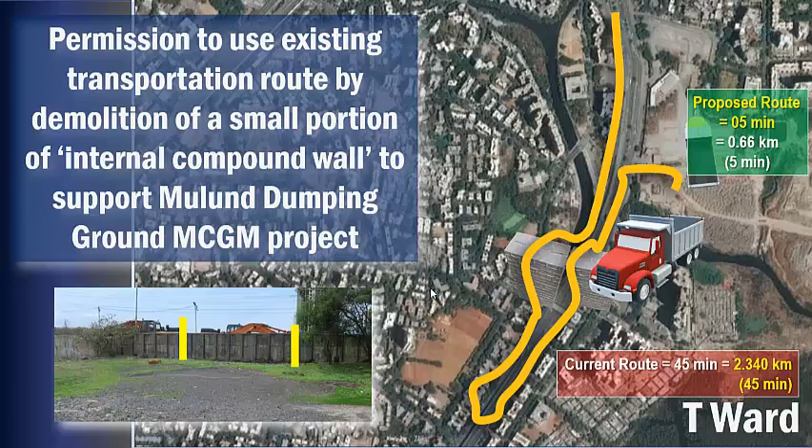MCGM had published a tender for clearing Mulund dumping ground by utilizing sustainable technology for reclaiming the land. Biomining India Private Limited has won this project in tendering process and at present executing the same. The Mulund dump site, which is in the T ward of MCGM, has a pile of 70 lakh metric ton having a height of 32 meters, which is equivalent to 10-story building.

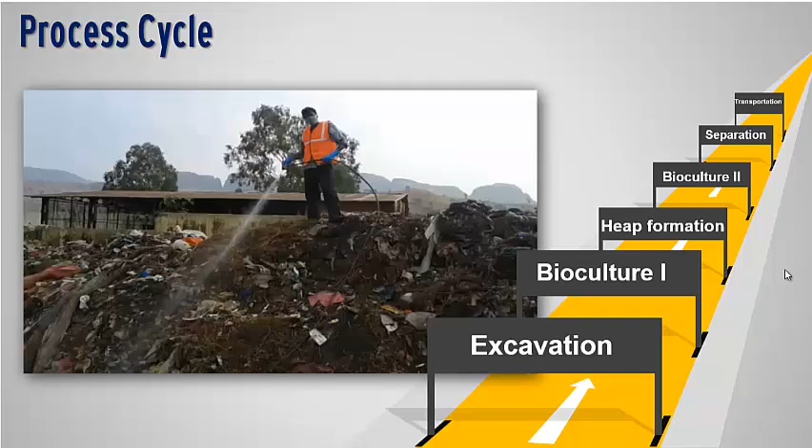The total execution time for this particular project is 5 years, where the initial years were utilized for taking required clearance, permissions and infrastructure erection. Sustainable process uses biomining technology in which biological processing on the dump is being done, and after segregation it is being separated into soil, boulders, debris, plastic, rubber, metal and RDFs.

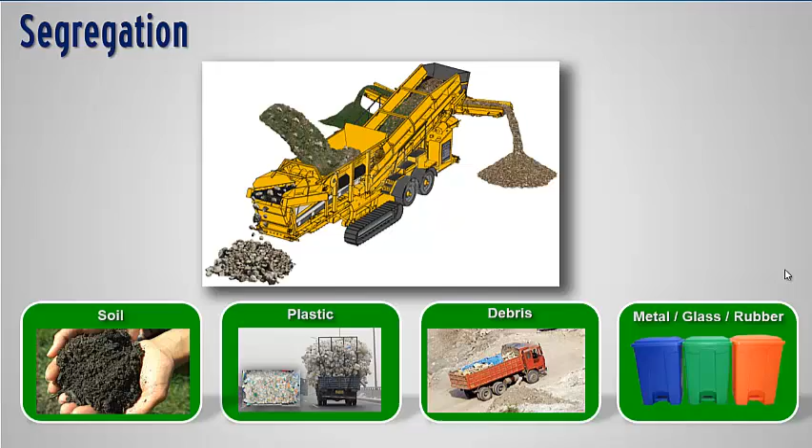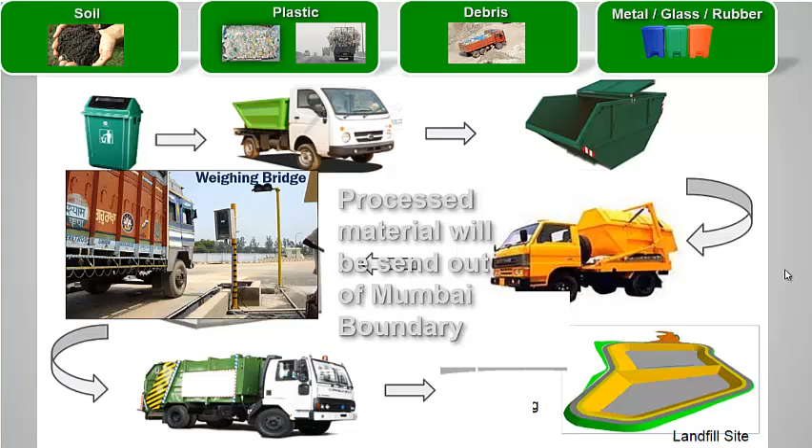These segregated materials are utilized for reuse and reprocessing and landfilling process. All the segregated and separated material has to be transported away from the dump site and away from Mumbai location. In this satellite image, we can see the location of a dump site adjacent to Eastern Express Highway, the location of Mulund Check Naka and traffic direction going towards and away from Mumbai.

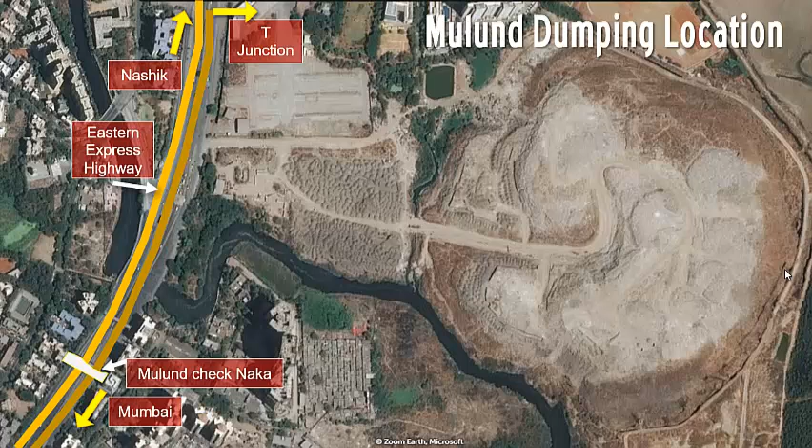On the dump site, these are the three distinct areas: office area, the storage area and dump and processing area. When the loaded trucks are leaving the Mulund dump site using the Eastern Express Highway, they have to go to Mulund Check Naka first, enter the Mumbai, again take a U-turn and leave the Mumbai and again clear the Check Naka and leave to the destination.

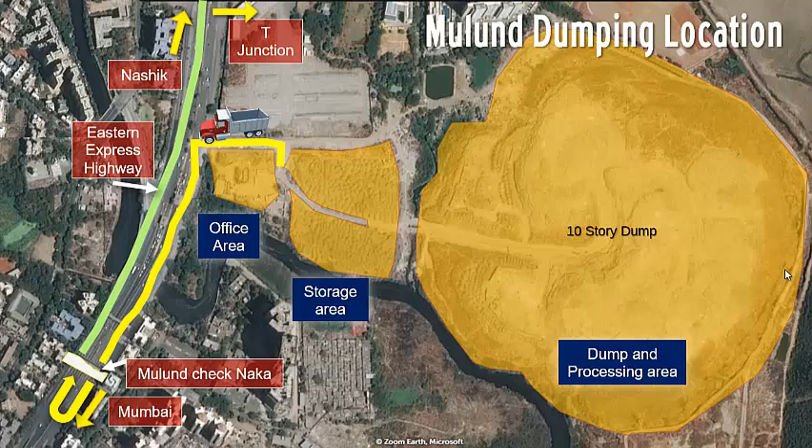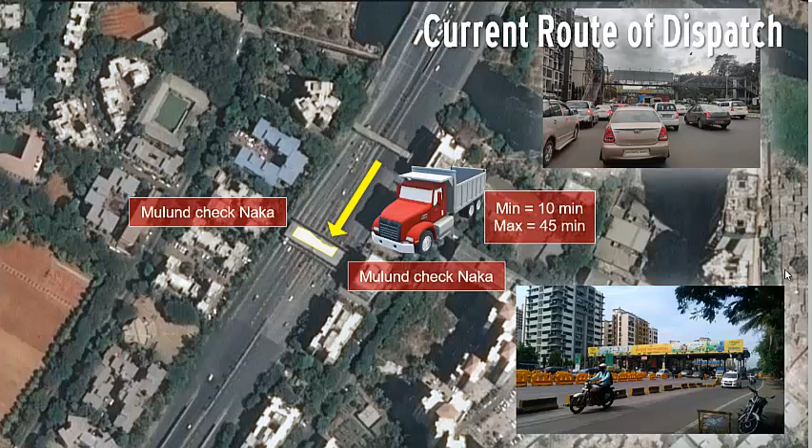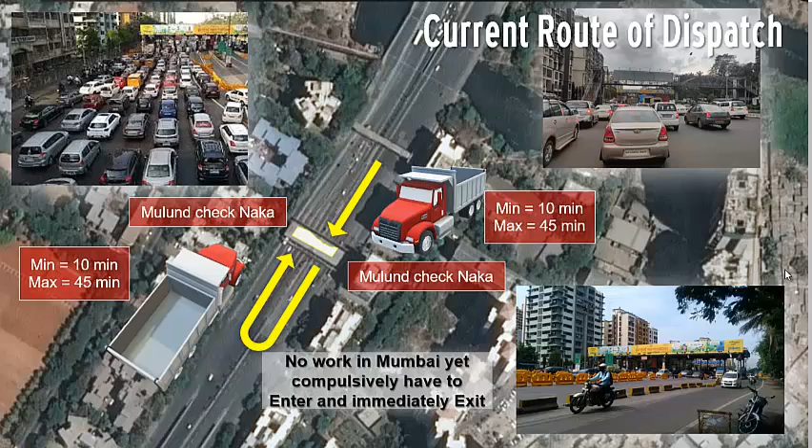Usually there is a traffic at Check Naka. It takes minimum 10 minutes and maximum 45 minutes depending upon the traffic density at Check Naka. Please note that all these vehicles have to enter the Mumbai and immediately leave the Mumbai, although the loaded truck does not have any work in Mumbai. Just to show the route, we are coming back to this particular slide.

Adjacent to Mulund dumping ground, we have the infrastructure of an Octroi office which is not being presently utilized for any purpose. This facility has 3 gates. Middle gate is functional and both the corner gates are temporarily closed.

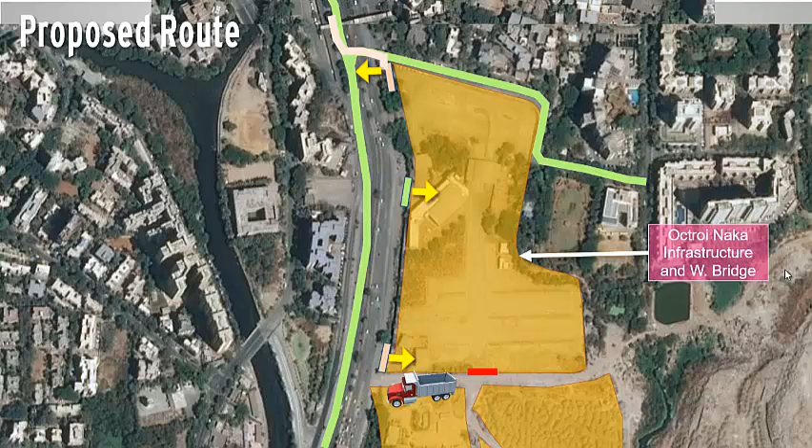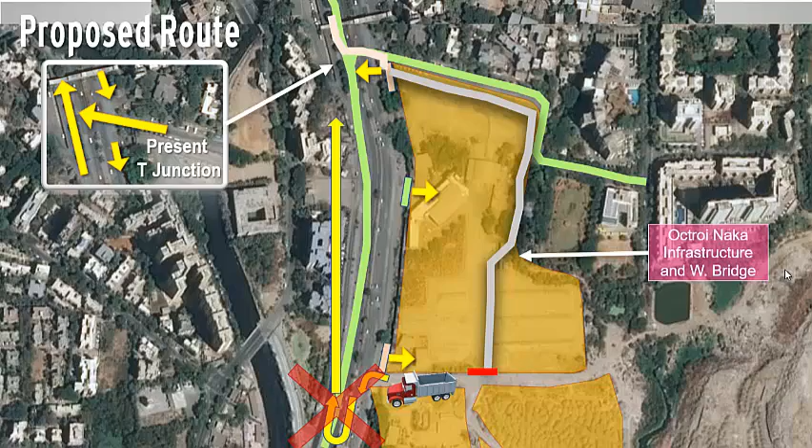We are requesting your permission to demolish a slight portion of an internal wall between Mulund dumping ground and Octroi facility, so that instead of taking the round route of Mulund Check Naka, the loaded truck can enter into Octroi facility. By opening the top side gate, the vehicle can directly land on Eastern Express Highway to leave Mumbai, because of the presence of a T-junction very close to the top gate of Octroi facility. This shows how the present facility looks at present.

In this video, we can see there is a well demarcated part that is separated from the rest of the facility and leads towards the top gate. If MCGM opens this gate, then it provides direct connection with the adjacent T-junction, as there is an existing road present just outside the wall boundary of Octroi facility.

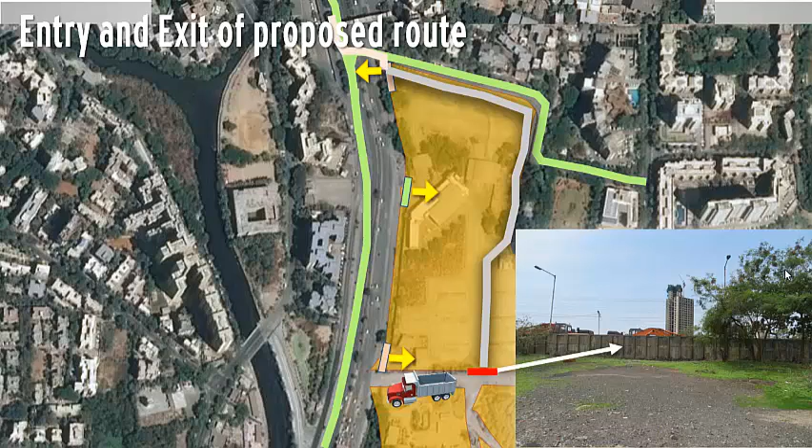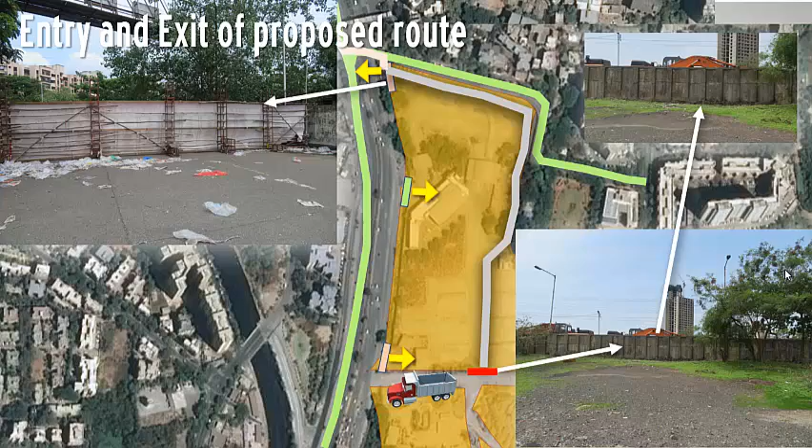This slide shows how the portion of wall looks from inside, and it also shows the present condition of the topside temporarily closed Octroi gate. As per the existing project, Biomining India Limited has a target of 8,000 metric ton per day. A single truck has a capacity of loading material of approximately 18 tons. It means per day, we have to make 444 trips.

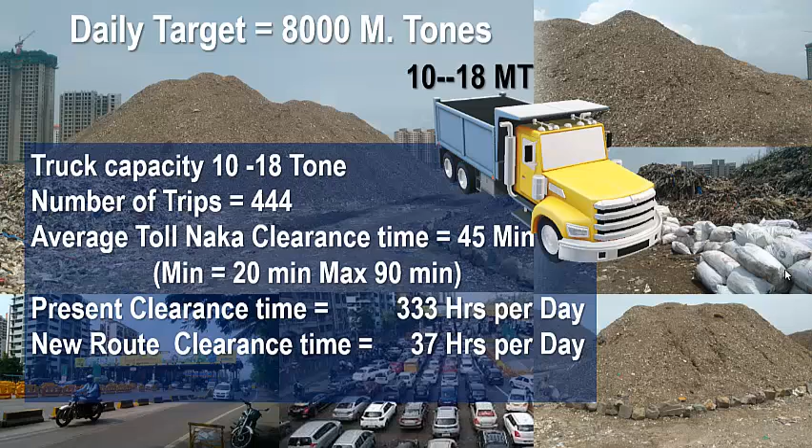If we take average clearance time at the checkpost equivalent to 45 minutes, we have to spend 333 hours a day for passing the check nakas. The clearance time comes down to only 37 hours if MCGM clears the requested path. This way, there will be total saving of 296 hours per day for the clearance.

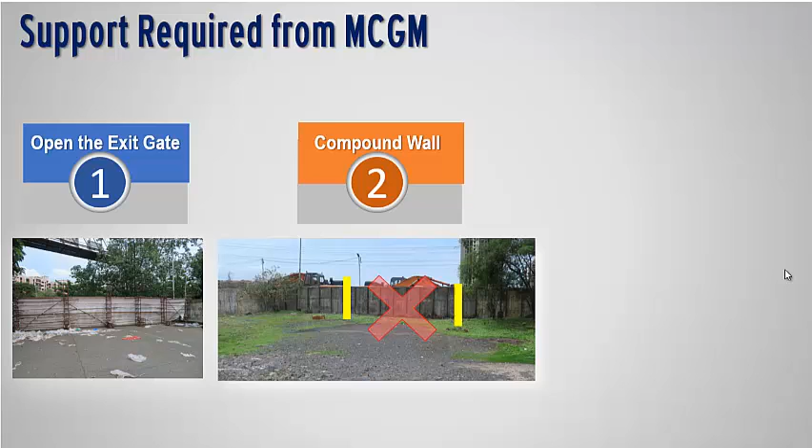We request the support of MCGM for three things. First is to open the top gate to allow exit passing. Second is a permission to temporarily demolish a portion of an internal compound wall and make the access. And third is permission to utilize the existing infrastructure to pass the loaded vehicle till exit gate.

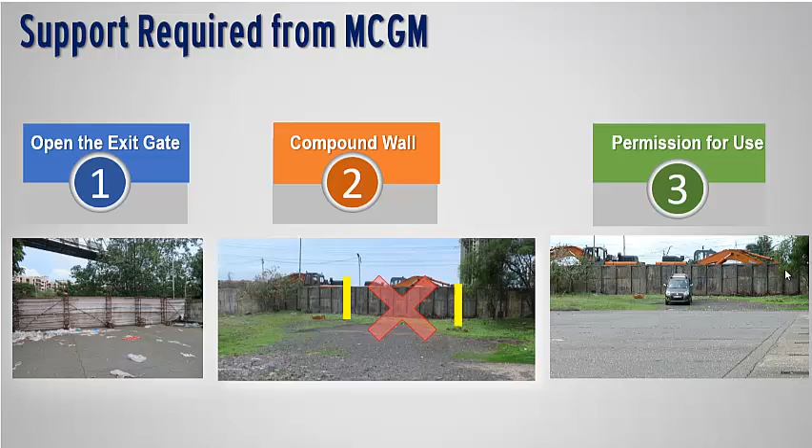What are the advantages? First, it will reduce unwanted traffic congestion at Mulund Check Naka due to loaded vehicles. Second, it will expedite the biomining execution process for MDG project, on which there is a guidance to MCGM from the High Court. Third is no additional infrastructure needs to be constructed because everything is in place to be utilized.

We will not do any damage to the existing infrastructure, and the removed portion of the compound wall would be reconstructed after completion of project. It will help MCGM to reduce the impedance of loaded vehicles on the free-flowing traffic at Check Naka, and it will assure high road safety for all other vehicles.

With this, I come to end of my presentation.